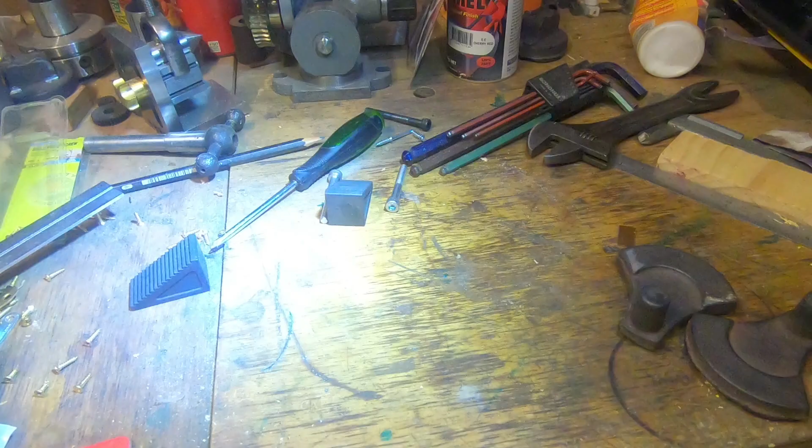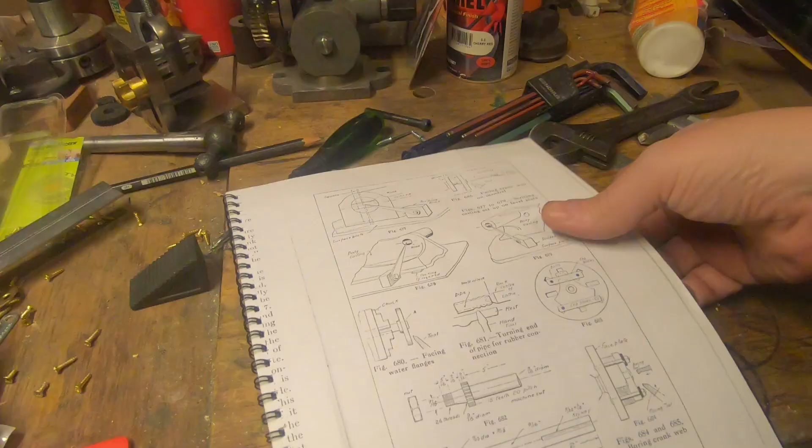First thing really is this crank, a bell crank. It's a funny little setup, and there's a few options and quite a lot of variations in the way it could be made. Looking at the book here, it shows a couple of options. One is a taper and a key and a nut.

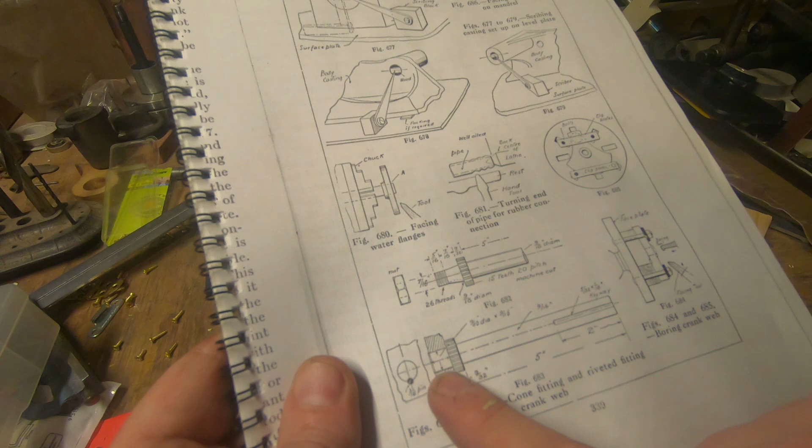I don't like this much because we're running out of space on the inside anyway, being a 3/4 size model. The other one is a push fit or a press fit and probably quite a lot of Loctite, and a Scotch key and a peened over end, which I like a lot more. So that's probably what I'm going to do, is just bore him out straight.

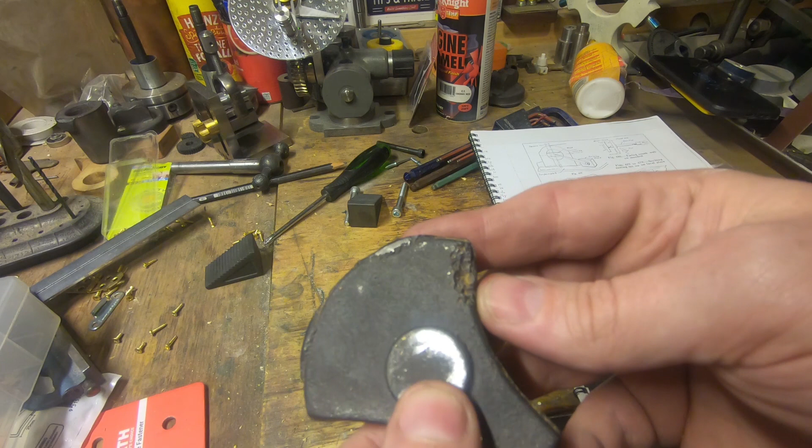I've given this a bit of a rub on the linisher here and here, really, and here, just to set it up and give us some flat sides. What we want to do is set it up on the faceplate, I think, so that we can bore this.

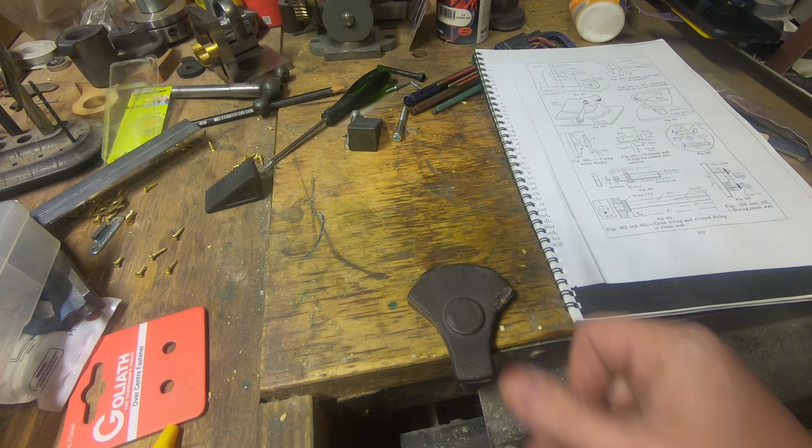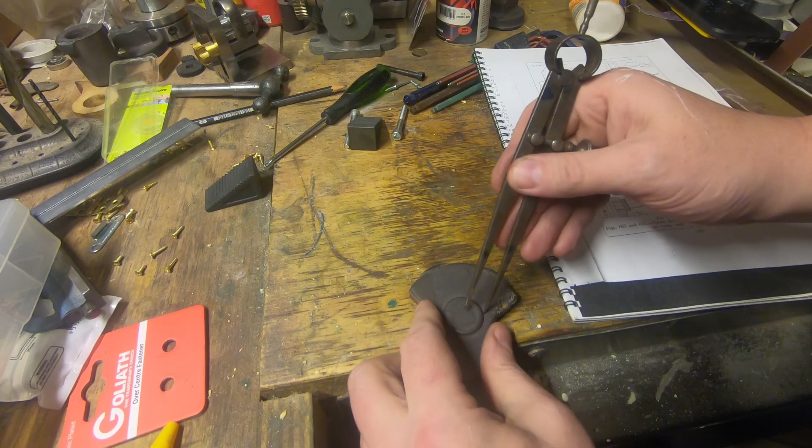Probably the first option, or the first thing to do, is to mark the centre of this disc. So I'll get a pair of dividers and do that, I think. When we've got that marked, I might centre punch it, and that'll give us a reference for setting that up.

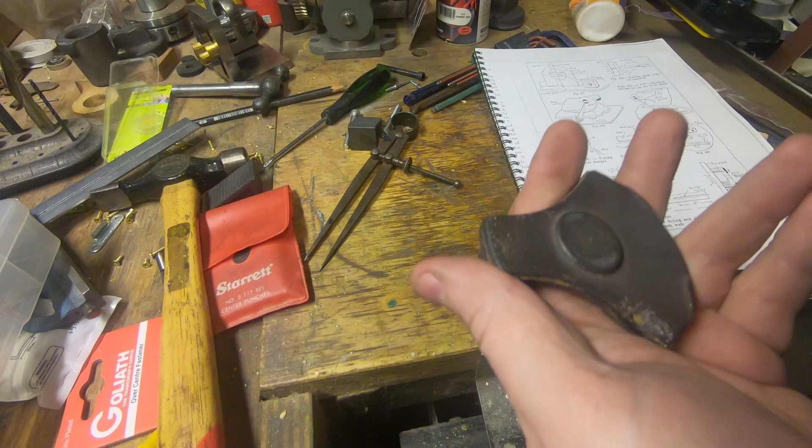It's a pretty nice little casting, really. Everything's reasonably flat and tidy. The book says, or it shows a method of doing this that's probably as good as anything.

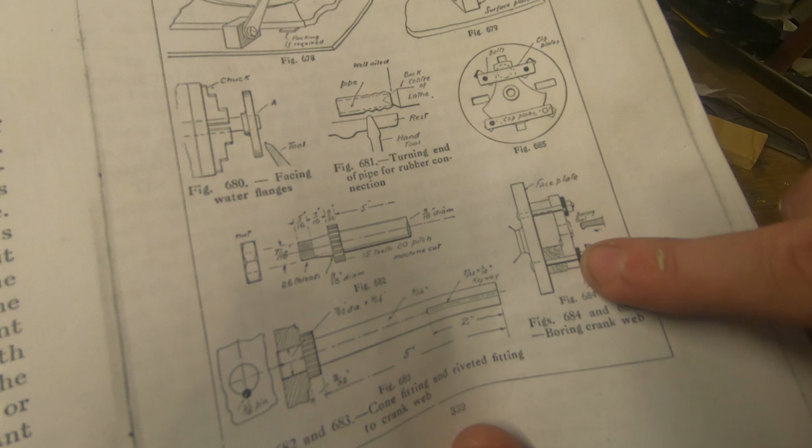We could set it up a dozen ways, really, if we had an adjustable pliers parallel, inside out on the faceplate. Now I've got a little faceplate that John Creasy made me out of a dive weight, which is a really nice thing for him to do.

And I've gone to the trouble of finding a block of wood the right thickness. I'm pretty close to the right thickness there, so that'll sit.

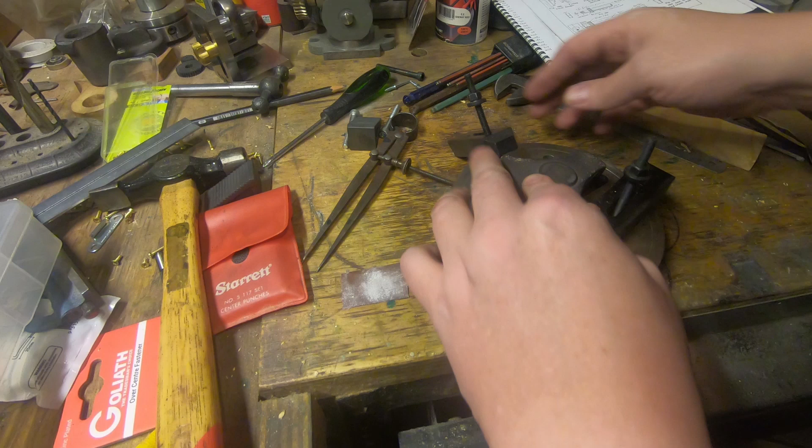The balance weight will sit nicely on there and give us a parallel under there. There's a bit of brass shim there, which will give us a fairly close, I think, sort of a fit as far as sitting nicely front and back. I've got a bit of emery cloth under there and that bit of brass shim.

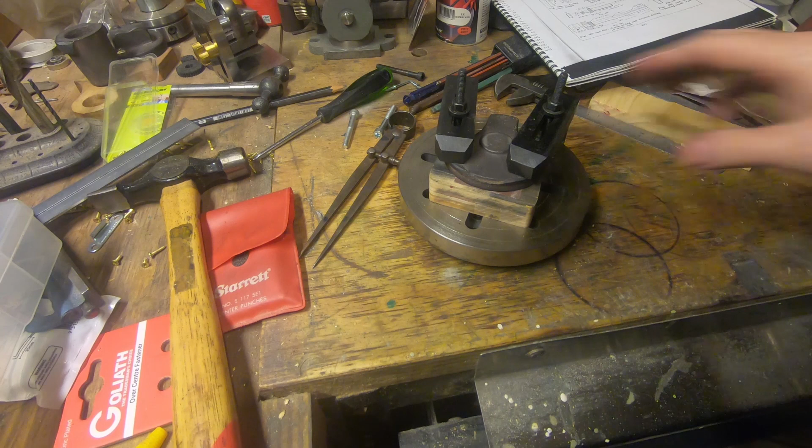And I've got some 10mm T-nuts that fit nicely in the slots in the faceplate. So I think if we were to bolt that down there like that and check it front and back with the indicator, and probably we could do that nicely on the bench or on the surface plate or on the mill table or anything else.

If we set up an indicator and check that there and there, so that this is level this way, it's got to be pretty level that way because it's a piece of plywood and it's fairly uniform. And if we got it right this way, just by shimming it nicely, we could probably set it up on centre there and bore it and face it and call this operation done.

We don't need to machine this around here, so these are quite okay here. This will be done when it's finally on the crank. And all we really need is a good setup surface on here to set this crank pin on when we set it over the other way to on centre to machine this.

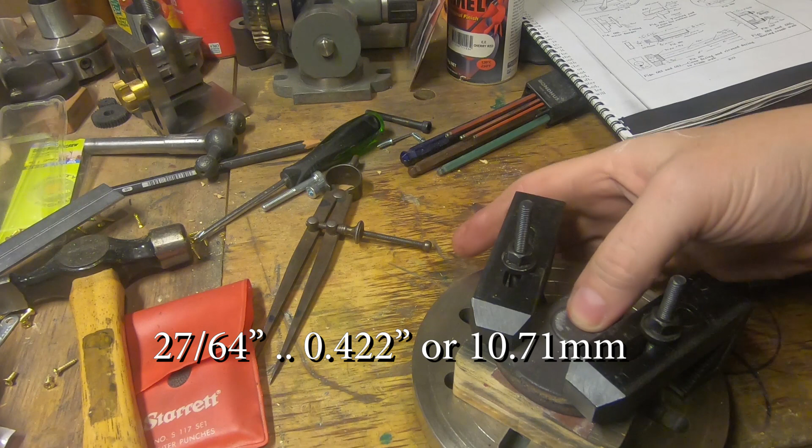And we probably need this reasonably tight. I don't like this one much in here. We should be able to face this and bore it to approximately 422, something like that, 437, and make the other piece to fit nicely. So that looks like a good setup.

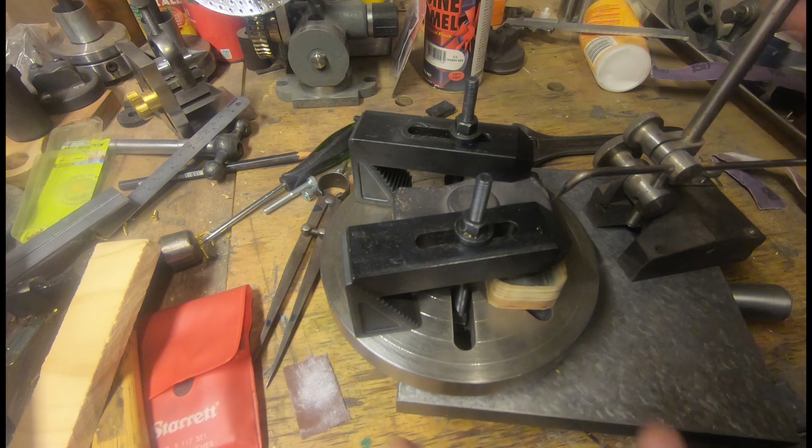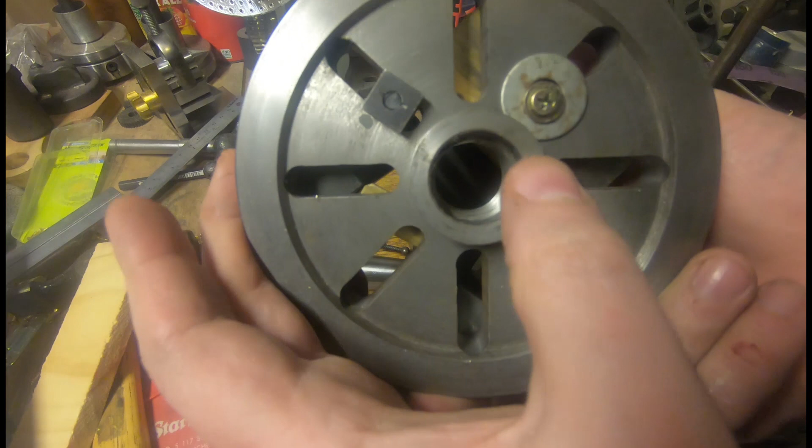So I've set this up pretty close here with a couple of tie down bolts, and I've got a block of plywood that I've actually screwed to the back here, and I've used two 10mm T-nuts here in the webs to hold all that together.

There's a piece of shim there which gets us pretty close to even here, and I've just used a scribe block the old-fashioned way, just for the fun of it, because it's a 1920s design. So that's just scratching there, and it's just scratching there. So that should be pretty even, I think, all the way across.

Next job is to set this up, and then I'll put this on the lathe and set this up with a centre and an indicator and get it spinning concentric this way. So we'll go across the lathe now and we'll do that.

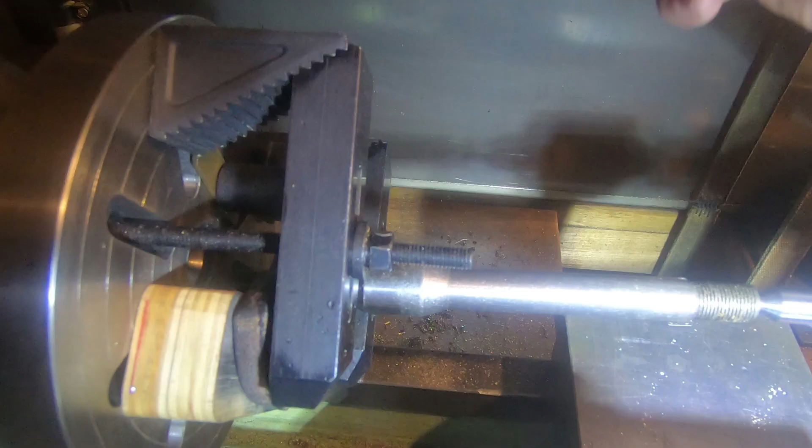So over here at the lathe, and I'll put the faceplate on the machine. This has got a fair bit of wobble in it, so it's going to need a good tap that way.

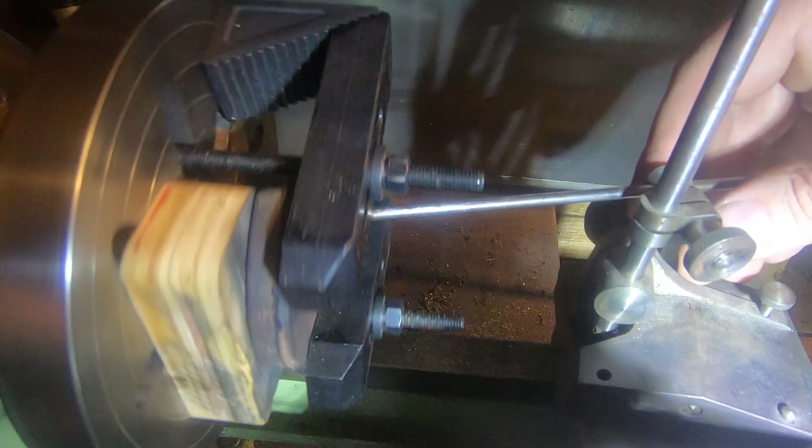So in the end, I've just set this up to a scribe block on the outside of that circle. It's a casting, and that's running pretty jolly sweet there, and that's probably where it needs to be.

So if we tighten that down now, we'll be able to drill that and get some sort of results. I'm going to drill it, and I'm probably going to see what sort of reamer I've got and ream it out. It doesn't matter very much what it is, as long as the other piece is identical. So let's tighten this down.

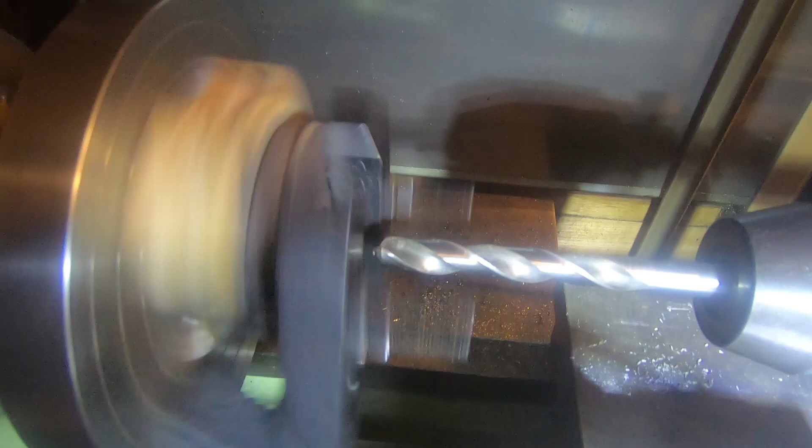And with any luck on that bit of wood, it shouldn't move very much, I think. So, we've got some joy there, really. Nice slow speed, and that's not going to move.

So there we go, we machined right through to 10.5. Now 421's 10.7 or something. So I'm going to go a little bit bigger, and it's not a real good finish there, so I'm going to set up a solid rock boring bar.

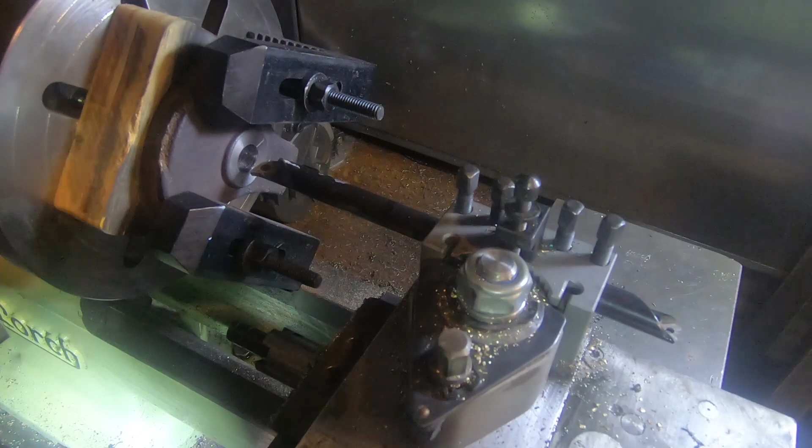And we can use that to face that boss as well, I think. So I've got that bore just pretty close to what I think it needs to be. Struggling a bit to get a good finish in there.

Probably it could be hard cast iron, but I think it's just the setup and a few other things. I think we can get a pretty reasonable dry fit in there and make that work. I've machined that down, and it only took about 5 thou to clean that up, not even. Very, very little to clean that up on there, so I'm really pleased with that, and it's nice and concentric. The bore in the centre I think we'll probably live with, and that might hold a bit of Loctite anyway.

So next job is to take this off and to set it up the other way around. So that's a back on the bench job. Let's go and have a look at this.

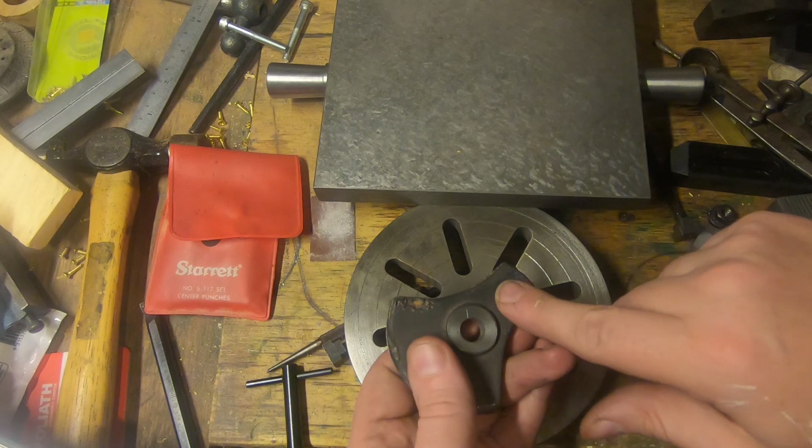So if we have a look at this, this has got to be offset 1.1. The drawing says 1.5 and we're only going 3/4 size, so 1.1 from the centre of this. I had a bit of a look and found a 27/64th drill, which is a really good fit in that hole.

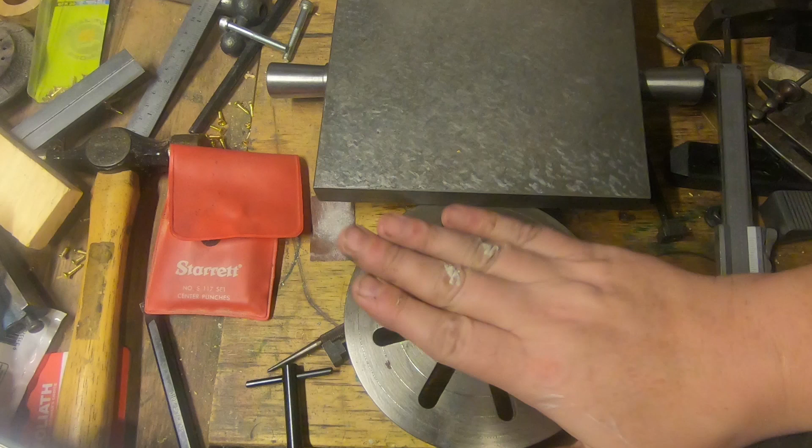Now I've marked this by taking half this dimension off the 1.1 and just scribing a line. It's not particularly good for your calipers, but in this pinch on cast iron it'll work. And I marked the centre. Then I've drilled it using that block of wood we used as a stop. I've drilled it here 1/8 on the right spot.

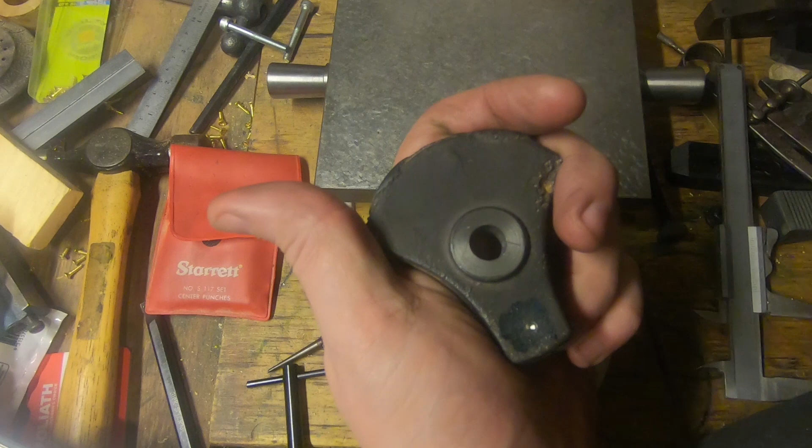So all we need now to set this up is a pin that fits over the right distance from the edge there so it doesn't rock, and we can put a couple of clamps on there, and that'll be a very easy machining job.

So probably we could just about get away with a bolt through the crank hole if we got this exactly right on the middle so it didn't rock. And that would be really nice.

So if we put this faceplate back on and put a collet in this headstock with a piece of anything really in it, a piece of metal, and machine that to fit on that spigot so that there's no rock in it, that should be exactly on the right centre, and we should be able to just machine this down. That's the theory.

We might need to put a bit of a balance offset crank on this side, so a bolt in this side, T-nut and a 6mm bolt and a decent little counterweight there won't hurt, so you might find a washer to go on there as well.

But let's set this up and we'll machine the spigot and we'll have a look at it and put this bolt on, and we might machine this while we're at it.

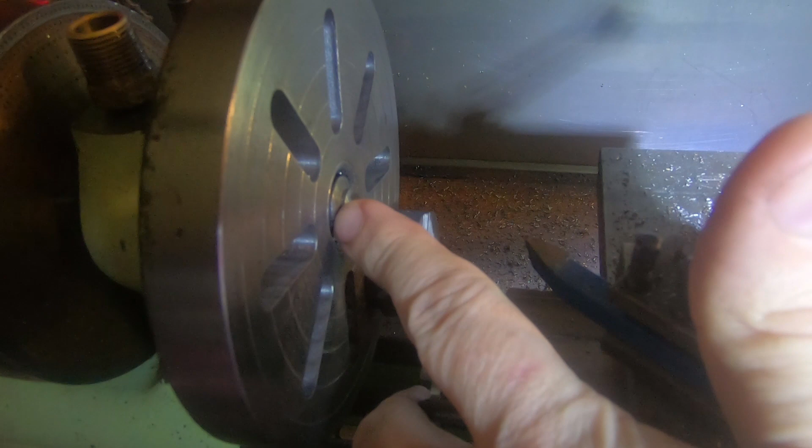So my camera went flat last night and I had a bit of a mess around. This lathe, we're lucky enough to be able to put the collet in the spindle as well as the faceplate or a chuck on.

So I've just made a plug in there with a bore in it, and that fits nicely in that little hole that's marked 1/8 from the centre here. So if we put that on there, that's got to be lined up and the spacing's correct there so that it sits nice and firm, and we can put a bolt in it.

Without too much messing around. And a counterbalance on the other side, and we're sort of done.

This is a piece of old cast iron bar I had sitting around. It's a bit sacrificial, so we can cut this out here if we need to clear the tool. But we've got this here. Now, that's all very well, but we've got a problem because this isn't going to clean up at the right centre. There's not enough metal on this side, and it's a pattern making problem.

That's not all that certain to happen, so while we're in it, I'm going to turn this down till it cleans up, probably 80 thou underneath, something like that. I'm going to make a steel bushing to shrink on there, which I think will be all right. That'll give us a hard surface to work on, and we can polish it as well. I think that's probably going to be okay.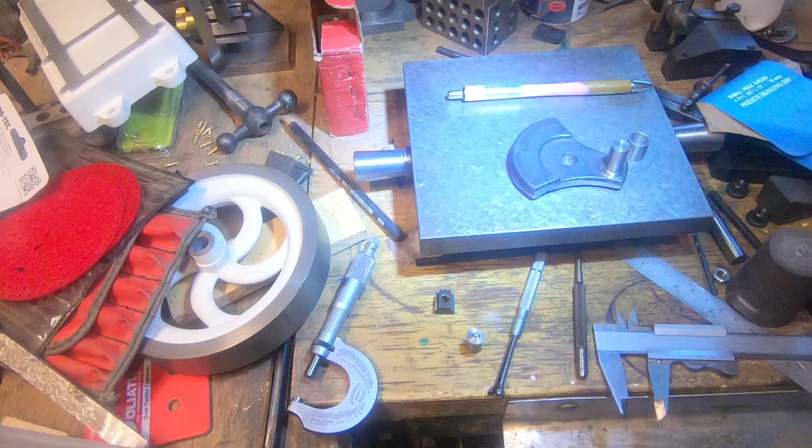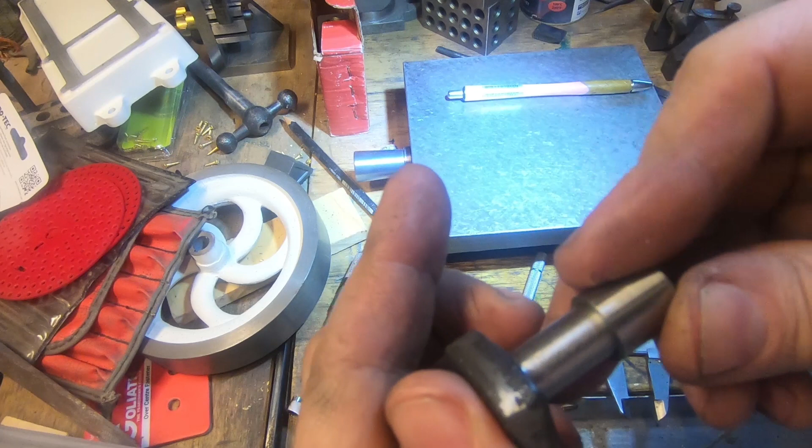Now I'm going to clean this up so there's nothing inside it. So that shrunk on there pretty good, and I haven't managed to bend it or anything, which I'm really pleased about. I had to actually press it on the last little bit. Probably wasn't quite hot enough in the bush, but I didn't want to wreck the temper on it either. That's polished up nice and it's right on size. I'm really pleased with that.

And I've given this a bit of a sand up around here. When we get the crank in and set it between centres, we'll machine this surface and this surface down to size, nice and neat. But I think this will do here, just sand it up on the linisher.

So the only thing really to do with this is put a washer on it, a crank, and a cross pin. I'm not going to do that just now. We might wait for a little while. It might be in the next video or it might not. There's not going to be a lot of continuity on any of these videos, it's just as we get the bits. So this, I think, is just about done.

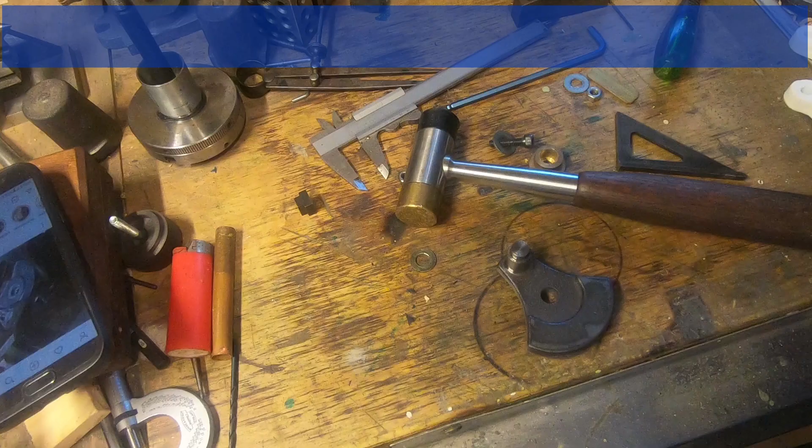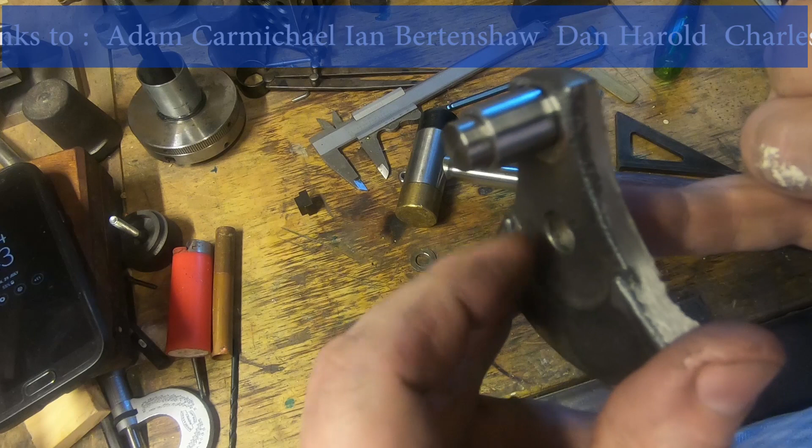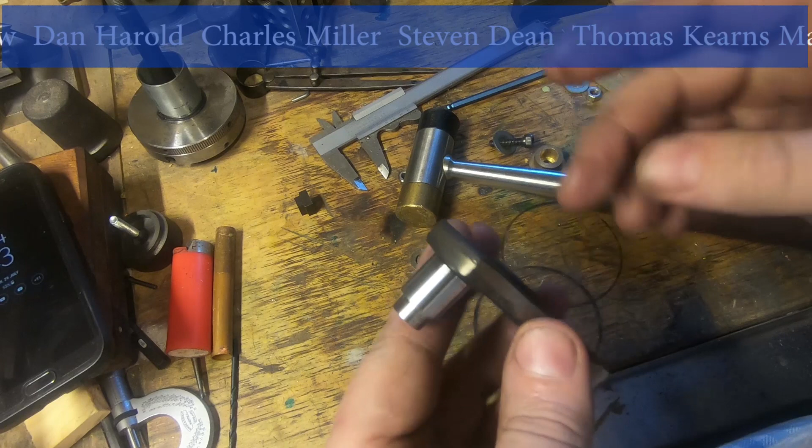Let's have a look at it on the bench. So there we go. Fairly pleased with that, it's nice and parallel. The crank is a push or a press fit in there, and the gear sits up against here. That's in the recess under the crankcase, or in the side of the crankcase. And then this is machined to go through the bush on the other side.

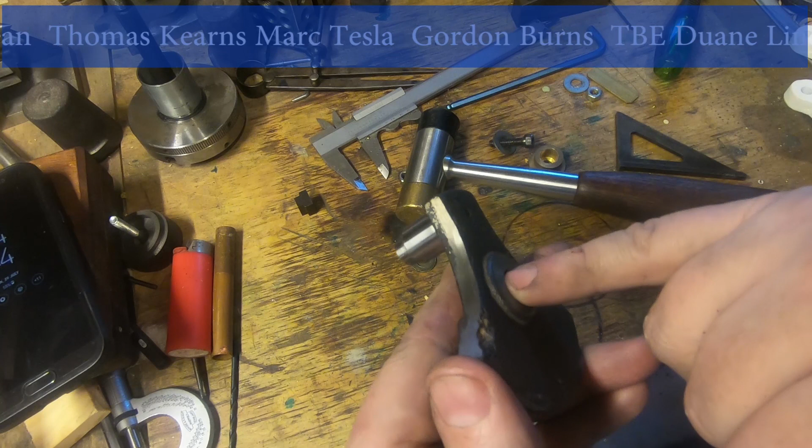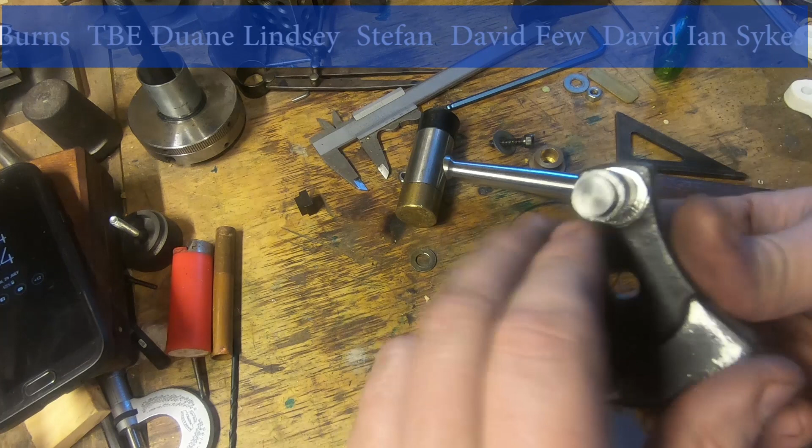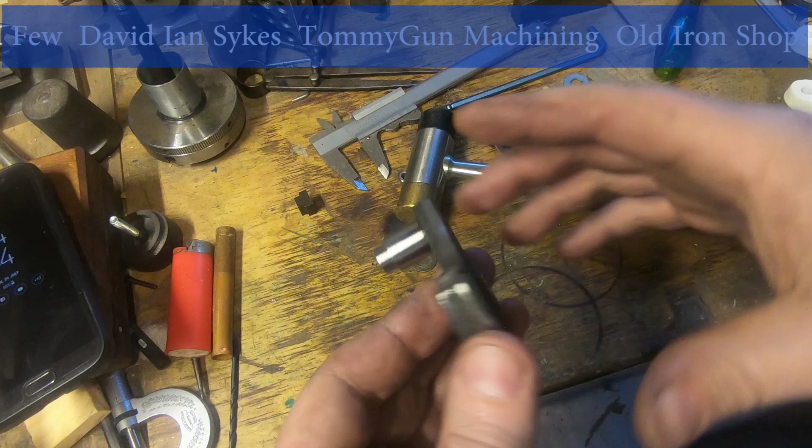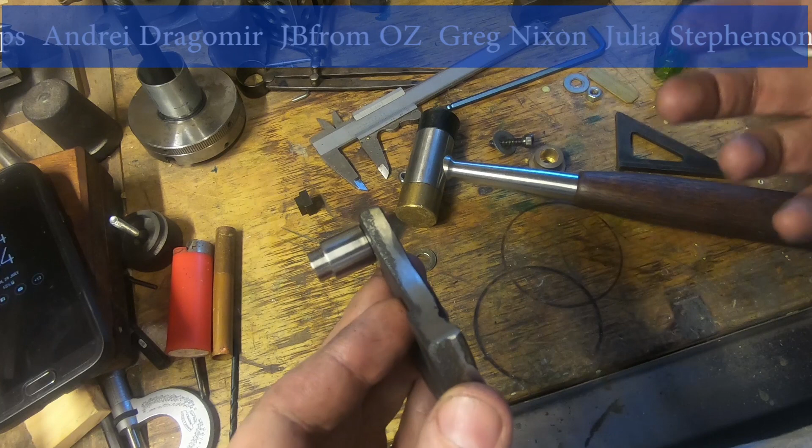So probably what I'm going to do is make a blank, machine it down to fit in there with the gear profile on it, cut the gear, and machine this down nearly to size, leaving a centre punch hole, or a centre drill hole, in the end here. Then we can machine this between centres and get everything running nice and smooth and true. That's the theory. I don't want to machine this last piece until we get the bushing done in the main body, because it needs to fit pretty exactly.

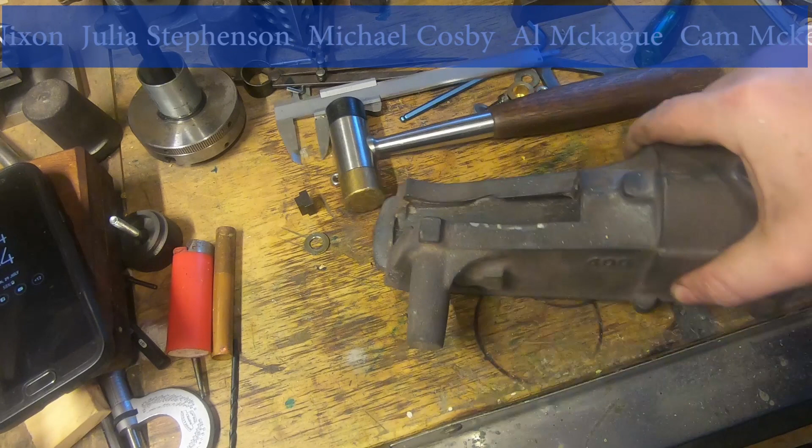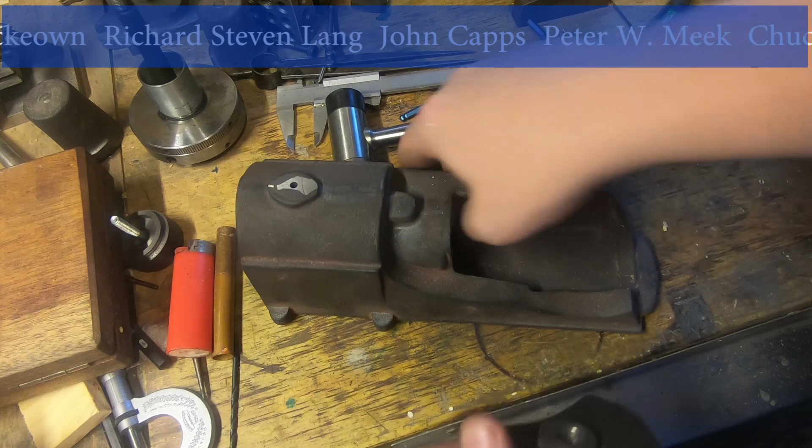This goes here like this, and this bush here, which the steel just runs on the cast iron, is a pretty good bearing, and a lot of things were made like that years ago. I'm probably going to put a bit of Devcon in this or something and clean this up. I might just leave it, but we'll clean this up first and see how we go. So I'm going to call that done for today. That's a good start made.

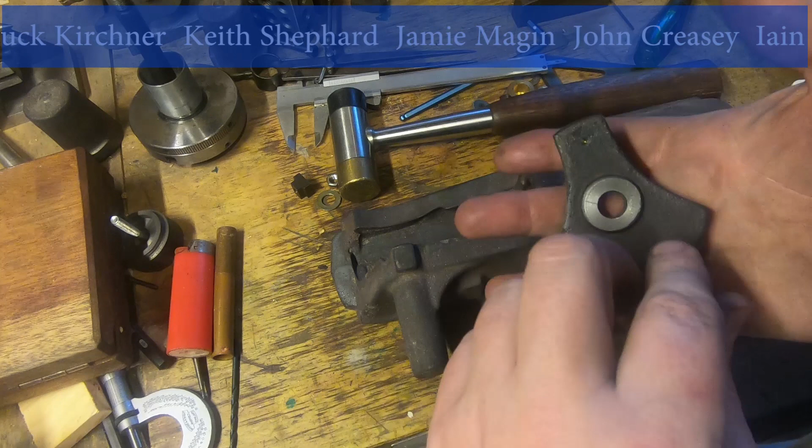And that's how it fits. Pretty happy with that.